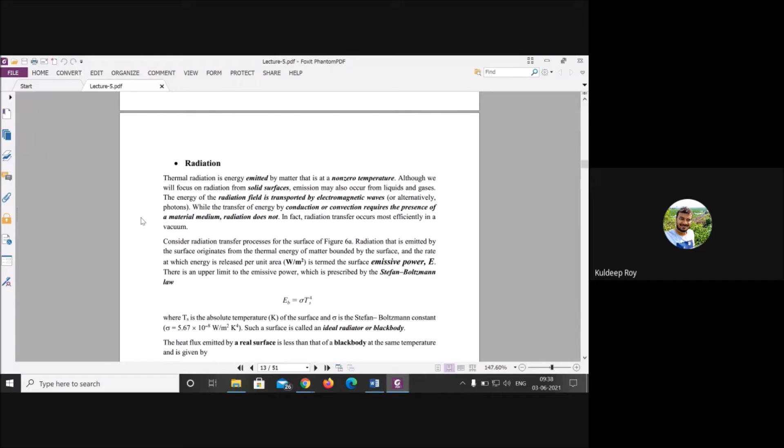Before going into radiation, we will see the fundamental thing. We have seen that due to the electromagnetic wave there is some kind of transfer of energy, but how is it happening, what is the basic reason behind that?

First we will see the very basic theory, called the Prevost theory, which tells us how energy is transferring from one substance to another. The statement is: every material body at any temperature above absolute zero radiates heat to the surrounding and at the same time absorbs heat from the surrounding.

What does that mean? It means if you have any kind of body, it has tendency to absorb heat and it has tendency to emit heat. It will emit heat from the surface, I'm talking about from the surface.

If you wear any kind of cloth, or have any tube bulb or fan, each and every time if it is in equilibrium position, then it will absorb some kind of radiation, and at the same time it will emit and radiate some kind of energy in the form of electromagnetic wave. This is the basic thing discussed by Prevost theory.

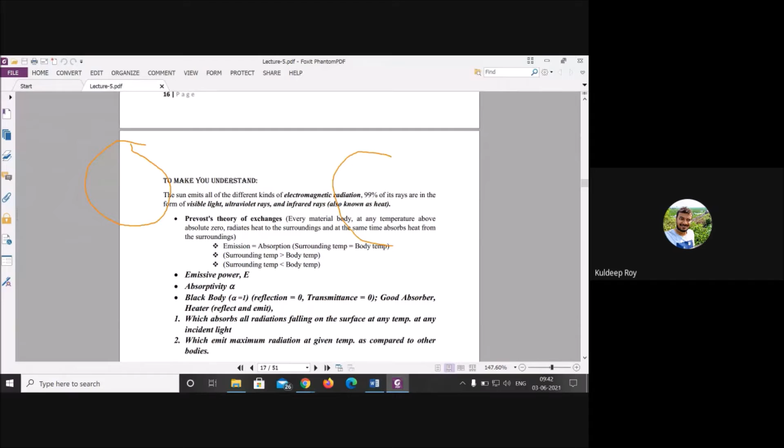This is your any random body, and this is your black body - see the concept of black body. This is any kind of body, I'm writing here B, and this is the black body.

Now, we know from the theory, for the ideal condition - this only exists in ideal condition - this black body will absorb all amount of energy, all amount of energy. Means it will completely absorb all heat. If I'm assuming that you are giving 100...

incident light - I'm just giving an example, just taking 100. If all the 100 rays come around the surface, it will absorb all that incident light. But the normal body will absorb only, if I'm assuming, near about 60, 40 or 50 - I'm taking 60. Now you can see it is absorbing 100 completely because this is black body, and the normal body absorbing...

absorption will be lower as compared to black body. So I am assuming here it is absorbing only 60. Now, if you talk about absorptivity, you have already seen that black body completely absorbs all the radiation, so absorptivity for black body will be 1.

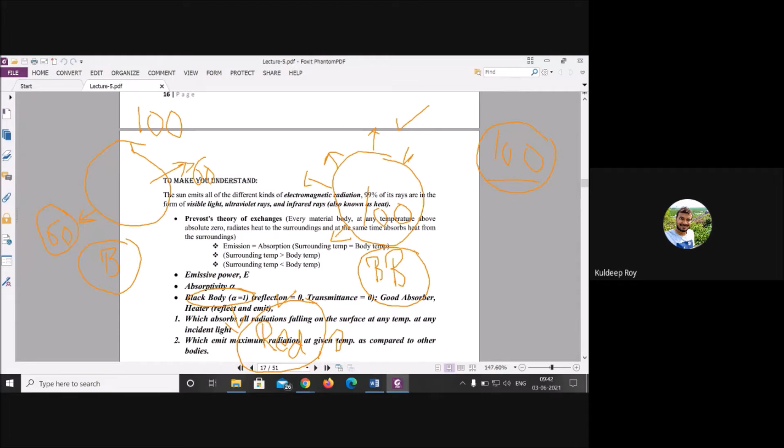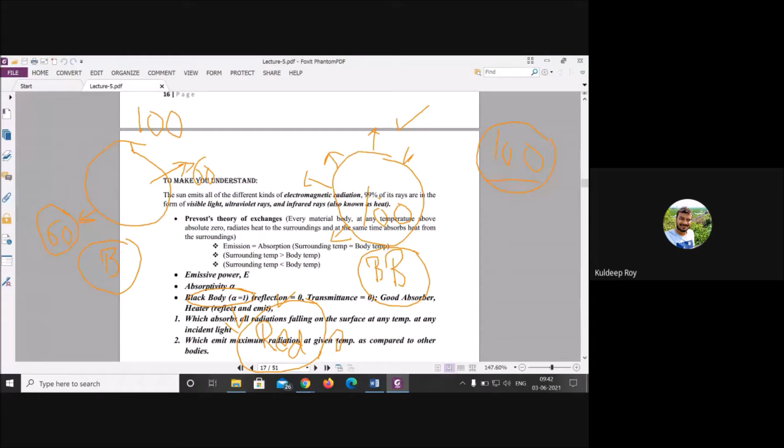So you have got a little bit of idea about how the black body works and how it is different from a normal body - absorption will be very high, then emission will be very high for the black body. So here is one formula, alpha - there is one formula, let me show it, I have already written it here.

Alpha is equal to heat absorbed by the body, how much heat gets absorbed, divided by how much light is incident on the body. Let's compare this theoretically.

Consider two bodies: this is your black body, and this is your polished body, where you have polished the surface with paint or any kind of glossy coating.

Now, as I told you, suppose you have given 100 light. This is just an assumption, I'm giving it in digits, and you have given 100 here also.

Heat absorbed by the body: if you're talking about a black body, it will absorb completely, so 100 out of 100 will be absorbed. If you determine the ratio, alpha is equal to 100 rays incident and 100 absorbed, so alpha will be 1 for a black body.

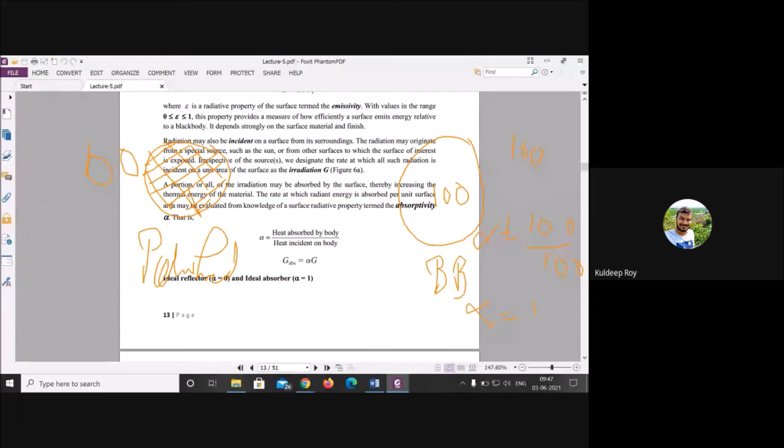You have proved that thing. But this is your polished body. What is the function of a polished body? It will reflect all the heat.

Generally, what people do in summer is wear white cloth. Why white cloth? Because its reflection is very high, it will reflect all kinds of rays and will not allow heat to go inside your body.

So this is the work of white color. Similarly, if you polish this surface, it will reflect all the heat. If you send 100 incident rays, it reflects all of it. If this body is an ideal reflector, absorption will be 0, so alpha will be 0.

So ideal reflector has alpha equal to 0, and ideal absorber has alpha equal to 1. These are hypothetical bodies, but generally used in industry. If you want to derive any kind of radiation-based derivation, you assume a body is a good absorber, in the category of black body, then alpha will be 1.

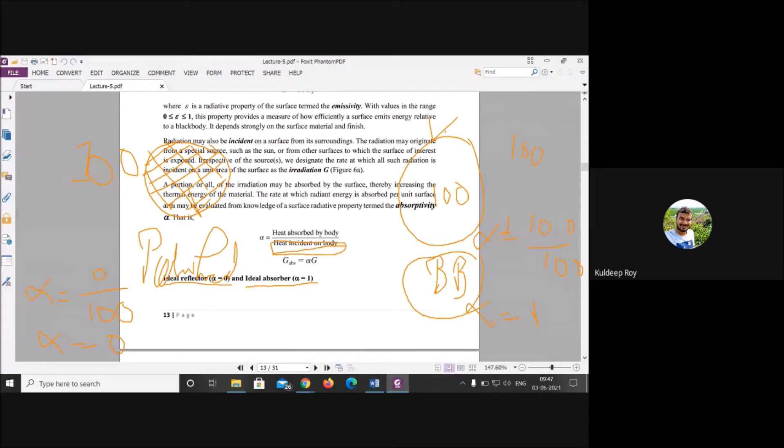So alpha is the ratio of heat absorbed by the body, divided by heat incident on the body, meaning how much light is incident on the surface of the body. I think you have got the point.

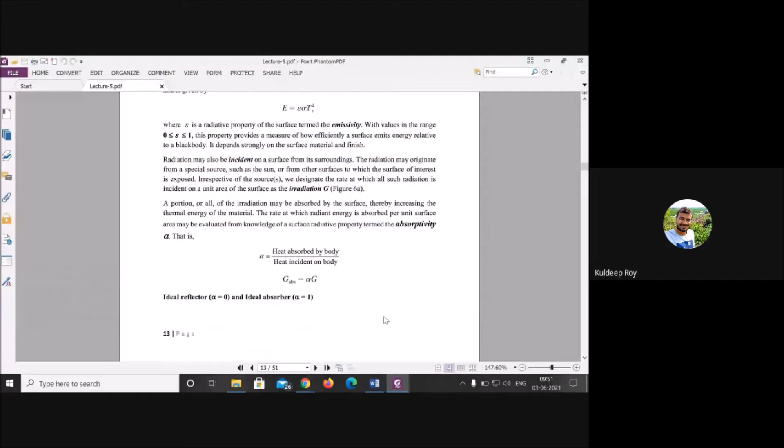So we have seen a little bit about emissivity, which depends on temperature, area, and other properties. Moving ahead, we have discussed black body as well, and now we will talk about some fundamental theories, like Kirchhoff's law.

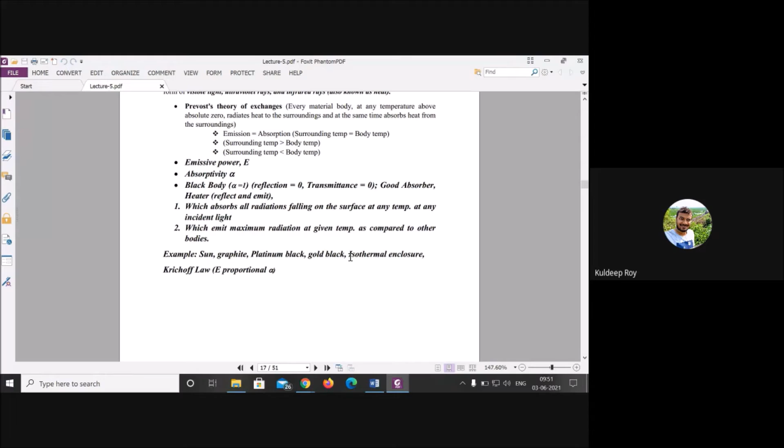There are a few examples of black bodies, like the sun, graphite, which is a black kind of carbon material, platinum black, gold black, and isothermal enclosure. These are examples of black bodies.

Now we will see what Kirchhoff's law is. It states that the emissivity of the body at a particular temperature is numerically equal to its absorptivity for radiant energy from the body at the same temperature. So emissivity is proportional to absorptivity. This is explained by Kirchhoff's law.

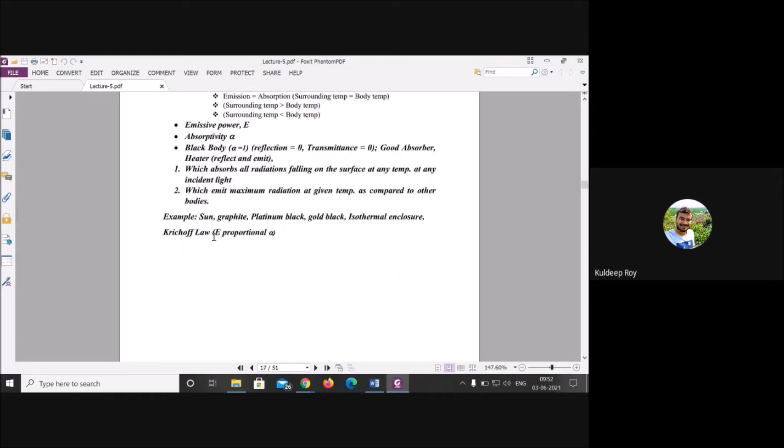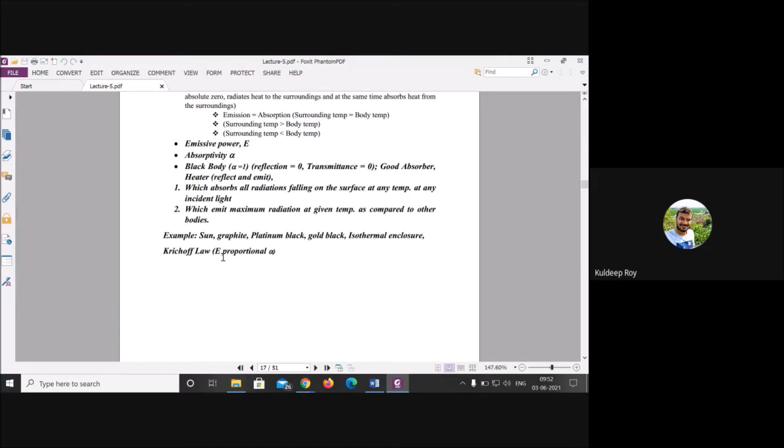We have written the same thing here, that it is proportional. If you are talking about a black body, then only this kind of condition exists, meaning it will follow Kirchhoff's law: complete absorption and complete emission are proportional, meaning both are equal. If there is any discrepancy, you have to add other factors to explain this phenomenon.

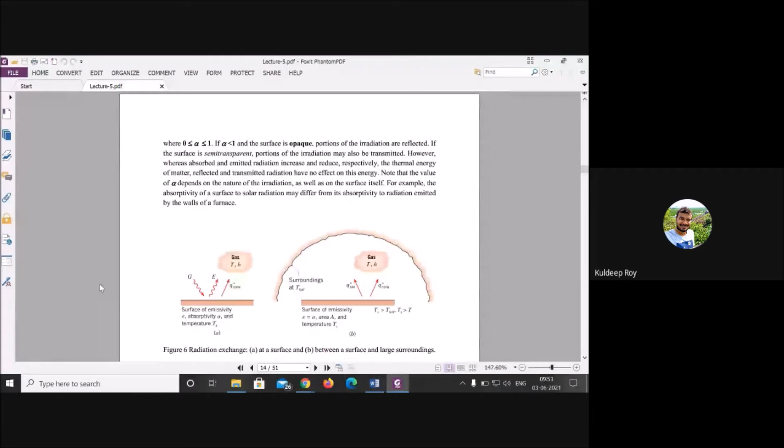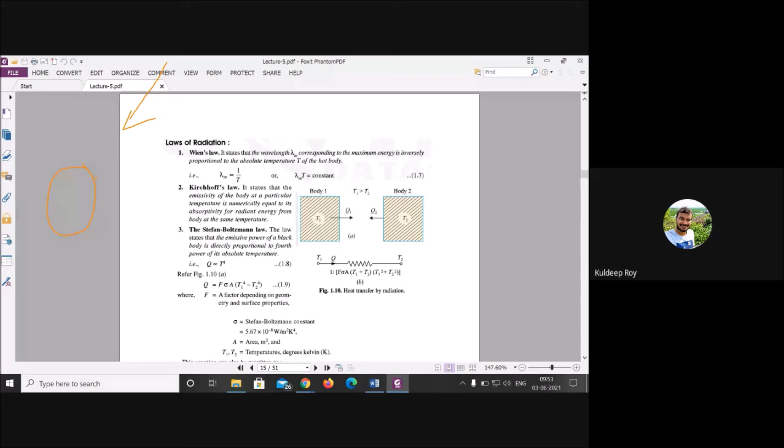Now the second thing is Wien's displacement law. It states that the wavelength corresponding to maximum energy is inversely proportional to the temperature of the hot body. It's saying that if you have rays coming from the sun, a body can absorb a particular maximum wavelength, lambda.

For example, 250 nanometer. If a body absorbs only 250 nanometers as its maximum wavelength, when you multiply this lambda with the temperature, how much heat it is absorbing on the surface will be constant. This is the formula of Wien's displacement law, and the same approach can be applied to determine distance as well.

If you have any kind of body, this is constant, it is a fixed value. By knowing the temperature, you can easily determine the maximum wavelength, and by knowing the value of lambda, you can easily determine the temperature of a particular body.

It can be very far from your position as well. If you have one body here and another body here, and the distance is 1000 kilometers or 500 kilometers, then how will you determine the temperature or lambda?

One body has some maximum wavelength with respect to temperature, you have to multiply, and this is also a constant value B. If you want to compare one body to another, just multiply, and you can easily determine how much the value will be.

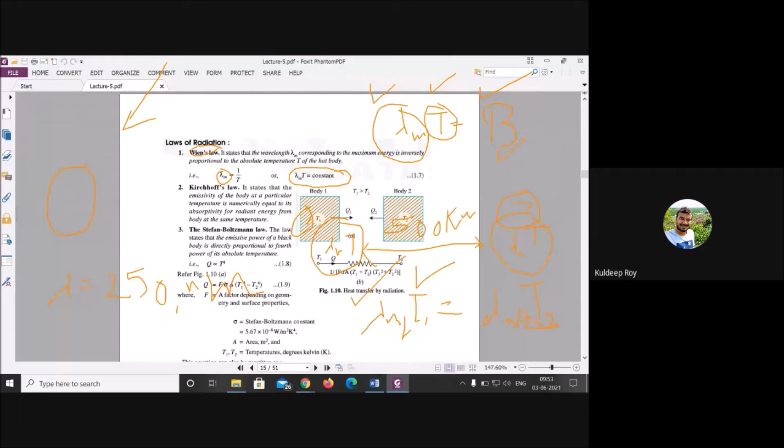Or if you want to determine the distance, since this is a constant value, you can easily determine lambda m. Lambda m is equal to beta, B meaning the constant value, divided by your temperature. You can easily get it.

Now the second formula, this is called the Stefan-Boltzmann law. It states that the emissive power of a black body is directly proportional to the fourth power of its absolute temperature. This means Q, the heat absorbed by the body, is proportional to T to the power 4.

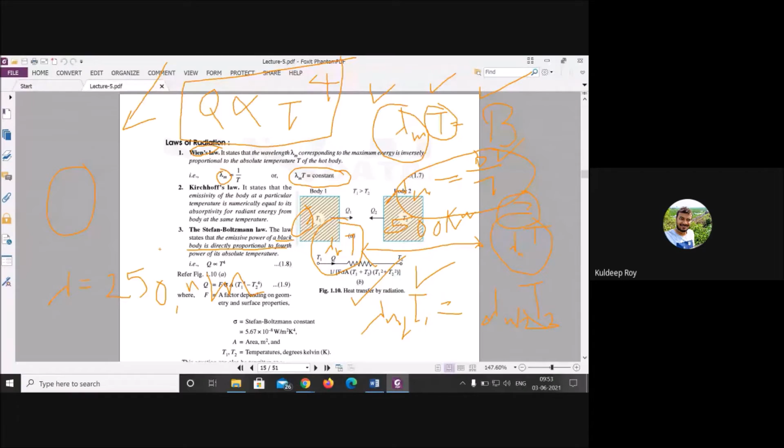This is the formula of the Stefan-Boltzmann law. These are the three very fundamental theories that explain the mechanism of radiation. So we will move ahead and discuss further.

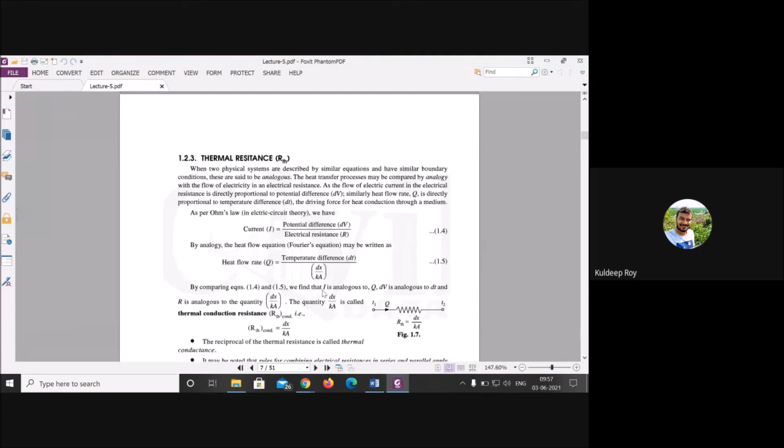Now we have also determined how much the internal thermal resistance will be. How much will be the resistance? The same thing we saw earlier, delta V by R, like in electricity: temperature difference divided by the resistance. This will be your resistance. The same thing you can easily determine here also.

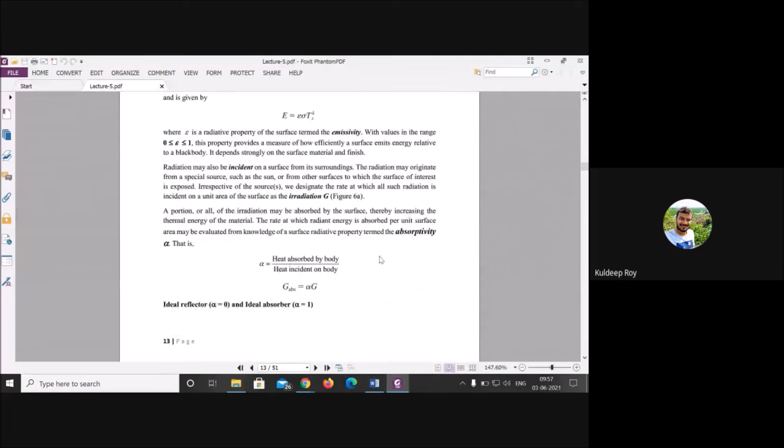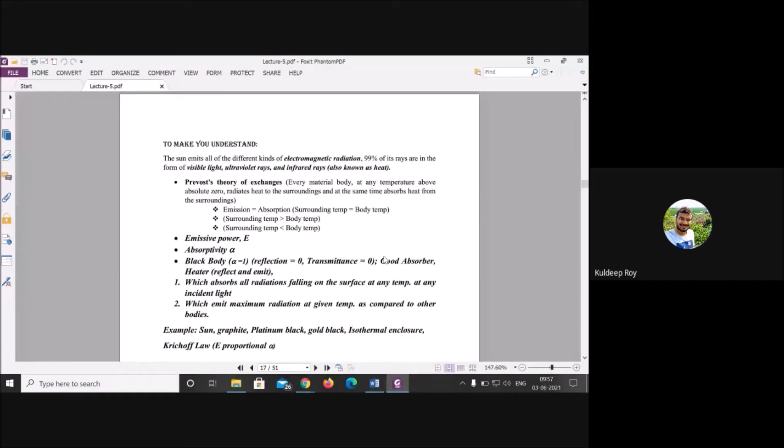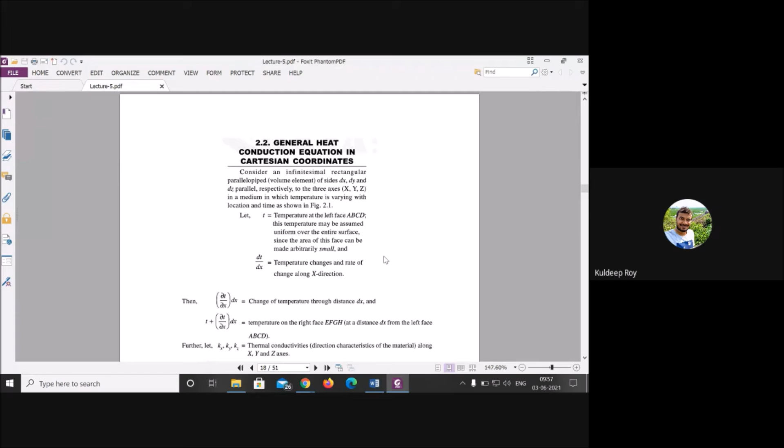Now you can see here we have determined this: the temperature difference, and this whole term will be your resistance term. Okay, I think this is finished. We will now see heat transfer by conduction, and how we can derive the fundamental theory, Poisson's theory—all these theories we will see.

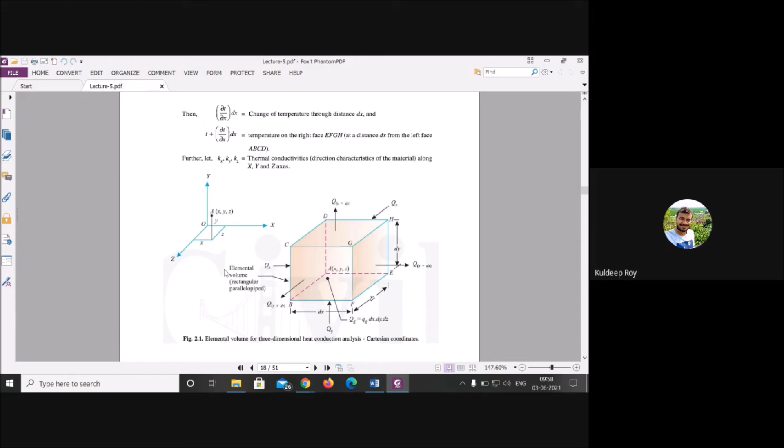So this is your body, any kind of three-dimensional body. What you have to do is determine how much heat will propagate from this position to this position, or in this direction, or upward. We have to determine in Cartesian coordinates how it is changing. So we have to write the material balance or energy balance at each and every point.

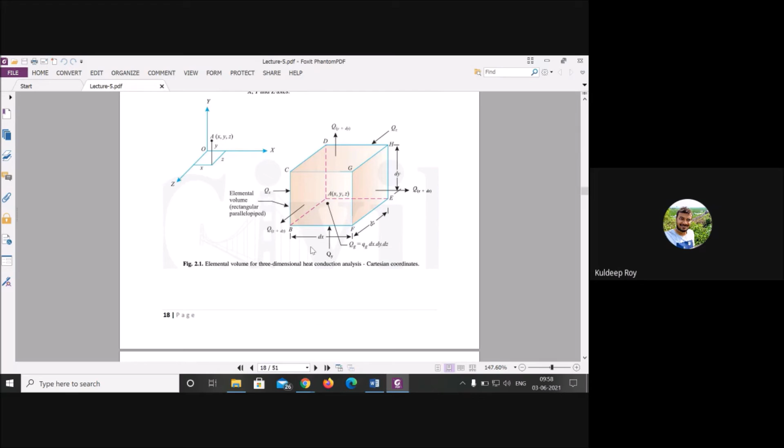Now start with the material balance. We will directly go to the final expression—not final, let me explain one by one. First, if you provide some heat, then at a distance delta x there will be a change in heat, qx plus delta x. As I already told you, whenever you write any material balance, you have to keep in mind that your dimensions should be balanced.

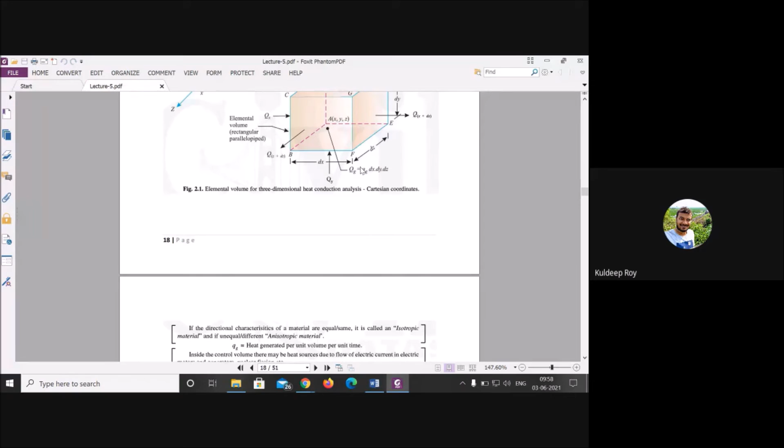Now you can see first heat generation, qg: the formula is qg equal to small q, the heat generation, multiplied by the volume of the whole cube, and you have multiplied.

After that, how will you write this thing? If the heat is flowing in one direction, let's say x direction, assuming x to x, you have qx here, and here you have qx plus delta x.

How will you write qx plus delta x? First you write this amount of energy, qx plus dou by dou x, qx multiplied by delta x. If you do the material balance or unit balance, if you cut this value, you will get the same q energy.

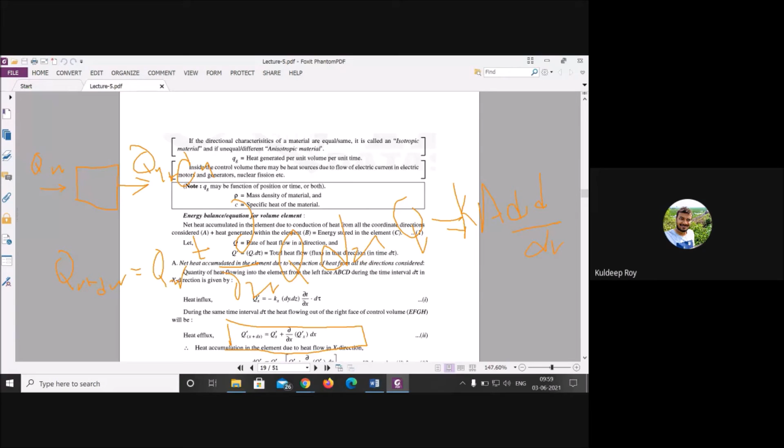Same thing is written here, qx plus delta x will follow this formula. Q will be ka, delta t by delta x, this is ka. This is Fourier's law of heat conduction. Just write all these values.

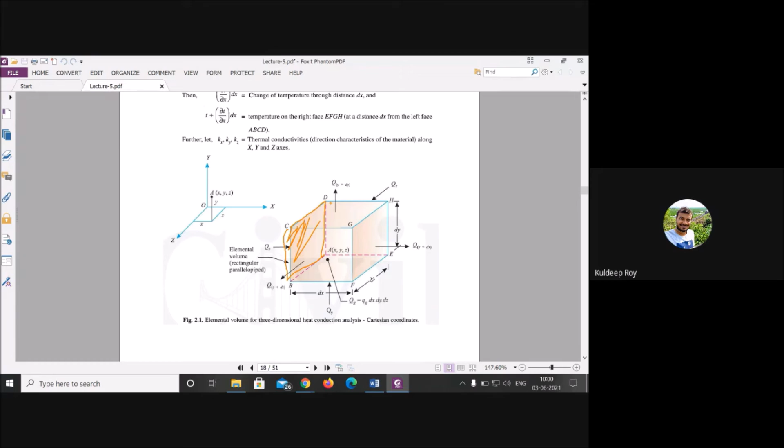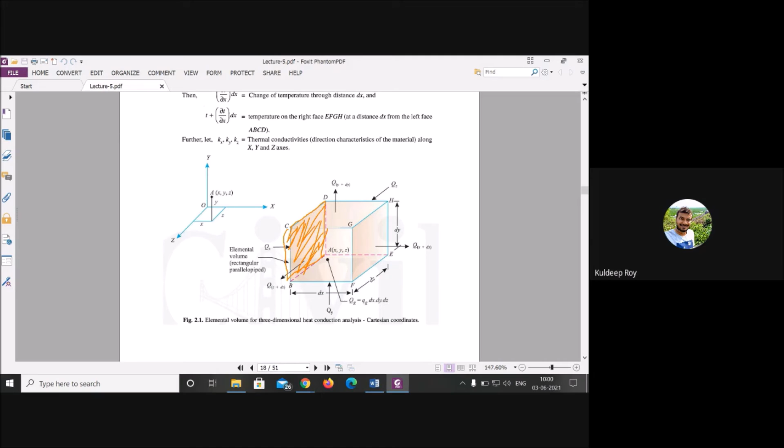Now you can see ka delta a will be your perpendicular area, as he has taken it. Perpendicular area means if the heat flows from this position, then the area will be this segment, this is y, this particular perpendicular area in the cube, that section, q multiplied by perpendicular area. It will be y here, and z here. That's why he has written delta y and delta z multiplied by dou t by dou x, multiplied by, this is for a small time segment.

After putting all the values, q will be cancelled out, because q you are entering will cancel out, and this whole term will remain. Q, you already know the formula, Ka del T by del X for a small segment, for a small time interval. When you multiply, you will get this value.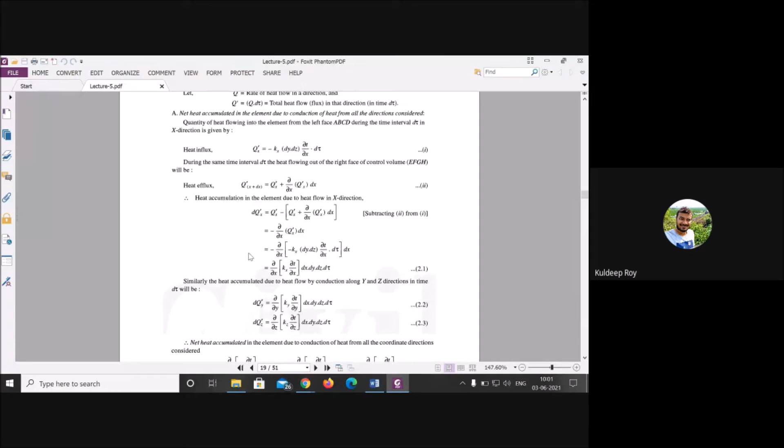Same thing you have to write for X, Y, Z. It will be the same, because if you write for one Cartesian coordinate, the others will be same for Y and Z, both positions will be same. Then you have to add all these things, and after adding, you get the final expression. Now you have got one term.

Then the second term will be your heat generation term, Qg. We have already seen that Qg multiplied by the volume for the small time interval, and this is the energy stored by the element. How much will it store? Now you can see rho is the density of the material, and volume, how much is the volume?

This is nothing but the mass, mcp dt, mcp delta T is equal to this, the formula using specific heat capacity of any material, this is the temperature difference and this is the mass, and rho is equal to m by v.

M will be rho v, and the same thing is written here, density multiplied by volume. If you put C as your specific heat capacity, C delta T by delta tau with respect to time, mcp del T. But if you do the unit balance, delta T will be cancelled out. We are talking about a small time interval, so we take delta tau and delta tau. I think you have got it.

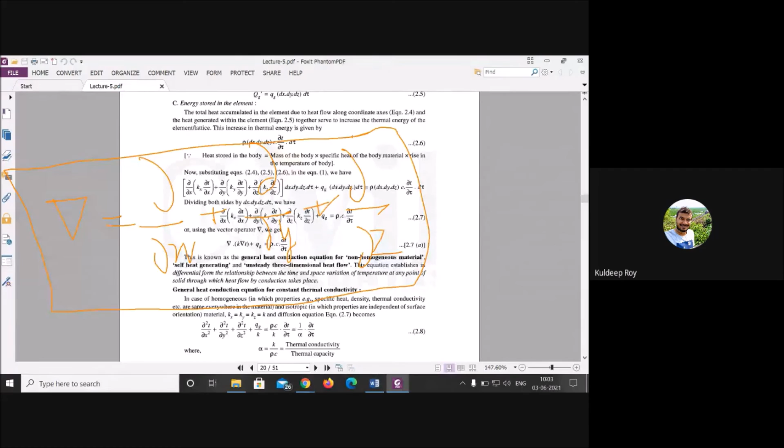K will be inside, and there is one operator as well. Now you can see, if you assume that thermal conductivity is constant throughout the material, then it will multiply. It is written here that if thermal conductivity is not changing with respect to direction, meaning it is constant, then it will come out. Now you can see kx, ky, kz, then it will come out and multiply.

It will become the square term. This is the square term. And this will be the whole formula.

After that, one more term comes into the picture: thermal diffusivity. I will discuss this in mass transfer as well. The formula is alpha is equal to thermal conductivity divided by thermal capacity. Conductivity is K, capacity is C multiplied by rho. This is your thermal capacity.

This final expression, when you rearrange, you get this final expression, which is called the Fourier's equation. When you assume that no internal source of heat generation is present, then this formula gets converted into this, and it becomes Fourier's equation.

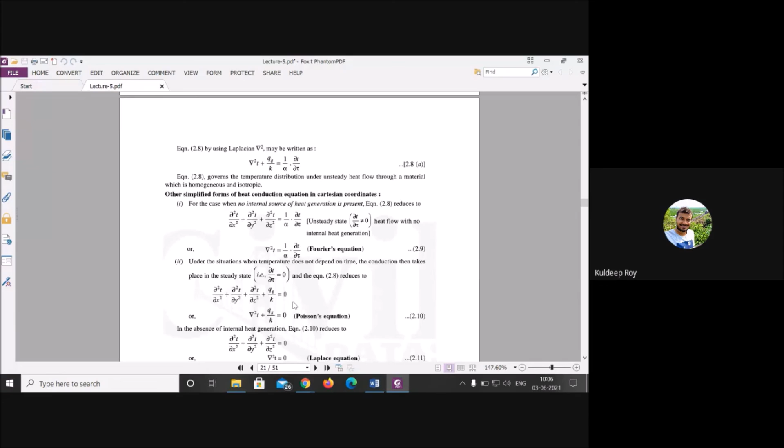Now this is the second term. When you apply, say, a steady state condition, this particular term will be 0. Then what will happen? This will be the formula. This is called the Poisson equation.

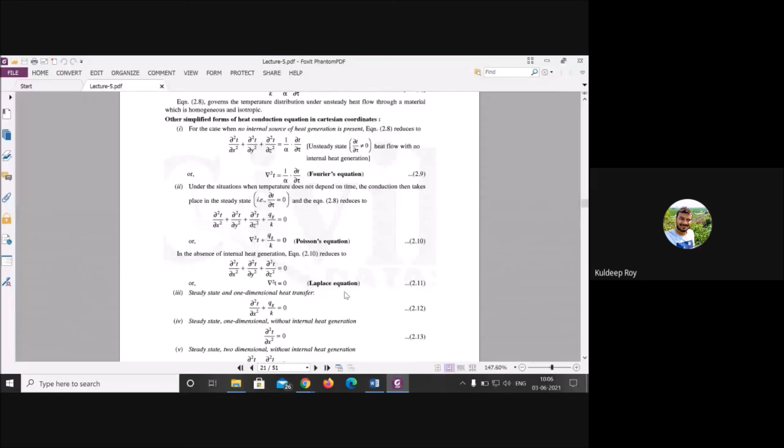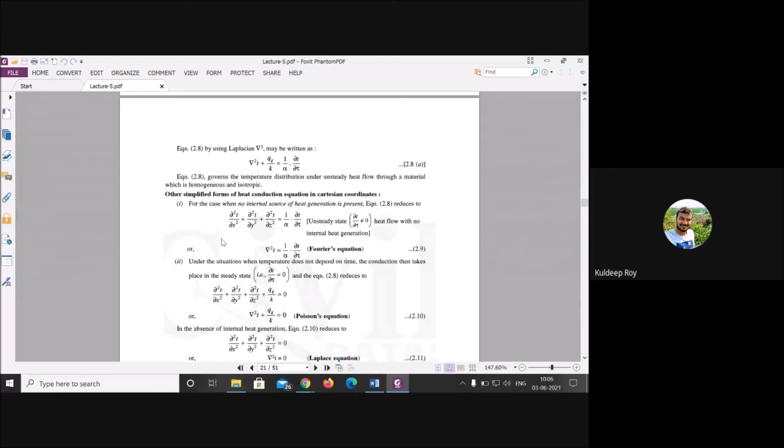And when you assume there is no internal heat generation and a steady state condition, then this is called the Laplace equation. These are further modifications based on your application. This is the fundamental expression for your Cartesian coordinate for any kind of body for heat conduction. For Cartesian coordinates, meaning x, y, z condition, only then this kind of theory is applicable. Here you have seen three kinds of formula: one is the Fourier equation, another is the Poisson equation, and the Laplace equation.

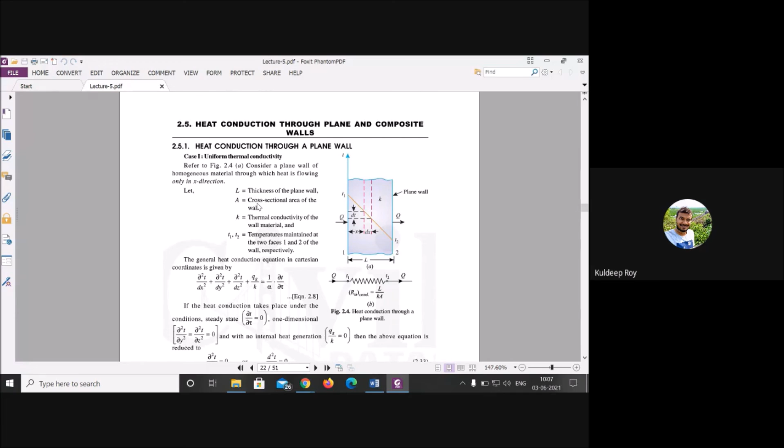This is for a composite body, and we have solved a lot of problems based on that. Here we have seen how the body acts as a resistance, and how we will solve it like these circuits.

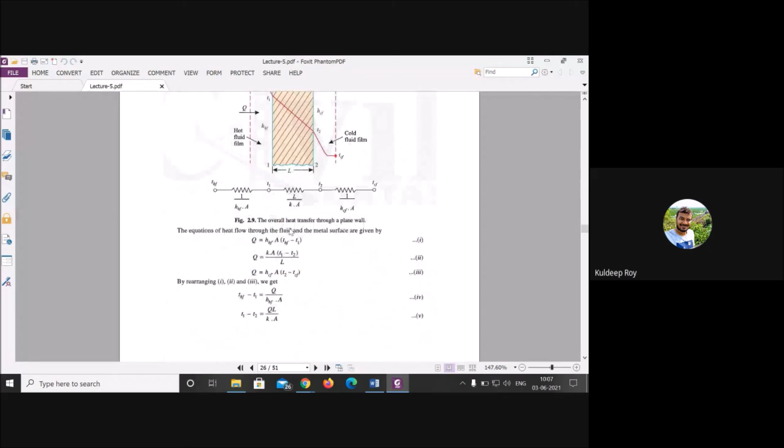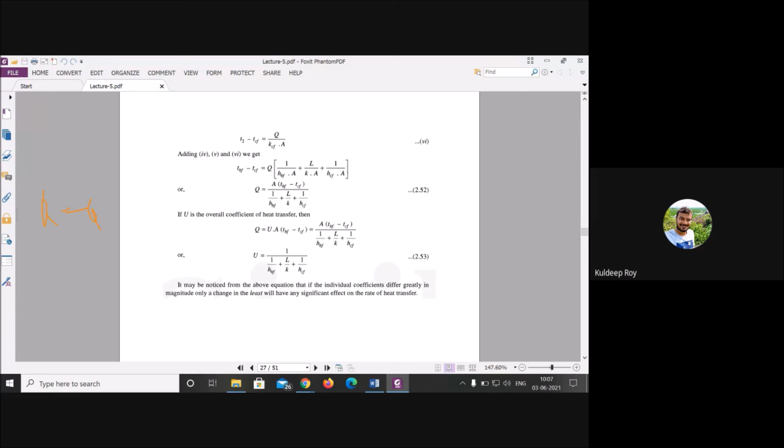Just add all the values, and by doing some rearrangement, you will get the final expression. This is UA delta T. You generally apply Q is equal to A delta T. Q is equal to KA delta T. And Q is equal to, for convection, HA delta T.

If you want to add both terms, then there is one formula: Q is equal to UA delta T. U will be your overall heat transfer coefficient. This is conduction heat transfer coefficient, this is the convective heat transfer coefficient, area, and this is delta T by delta X, which is your change in temperature.

And here it will be UA delta T. Delta T means the whole body. If you are talking about composite, there are three kinds of material, 1, 2, 3, and here will be some hot material, and here will be the cold material.

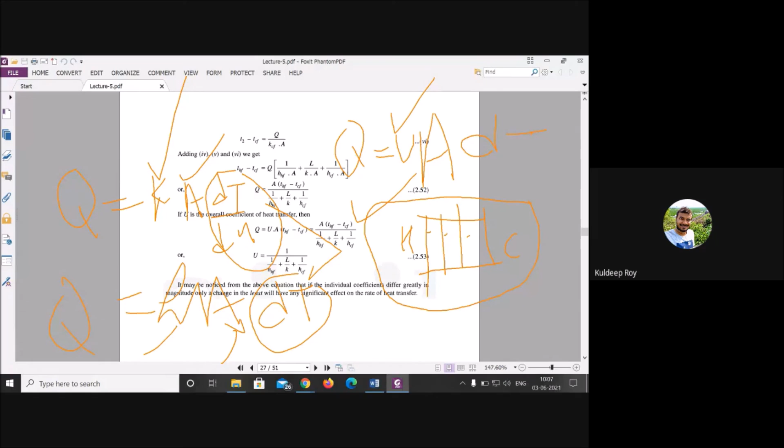If you want to determine the whole heat transfer for the whole body, then you have to apply Q is equal to UA delta T. This is the formula for overall heat transfer coefficient, and if you see, it incorporates both convective heat transfer and conduction heat transfer.

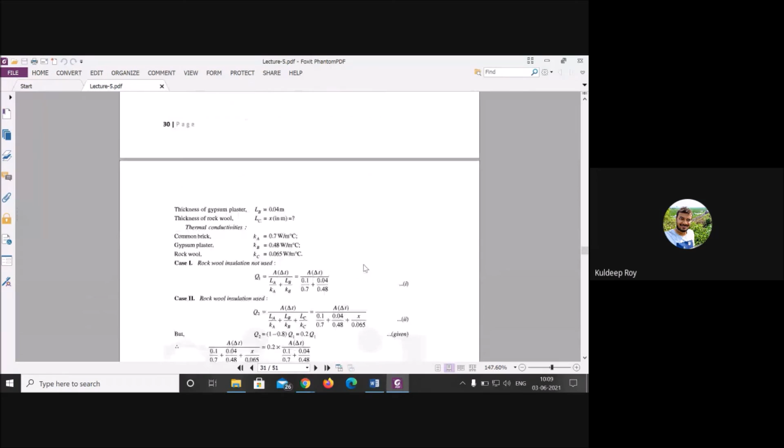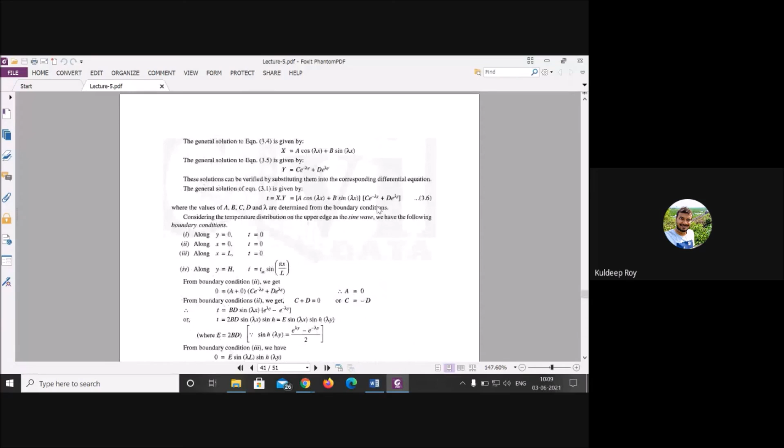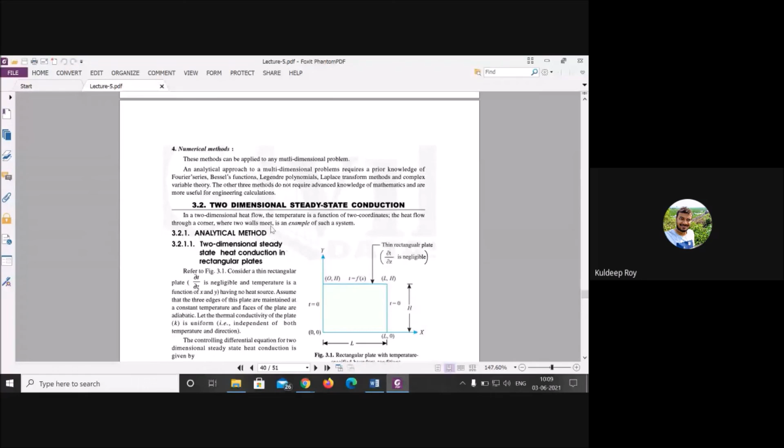And these were the numericals, and we have solved 5 to 6 numericals as well. We also did this simulation as well, and here we also discussed that there are three kinds of approaches: analytical method, graphical method or analogical method, and the non-dimensional, or you can say the numerical method. These are the three approaches we generally apply to determine how much is the heat transfer.

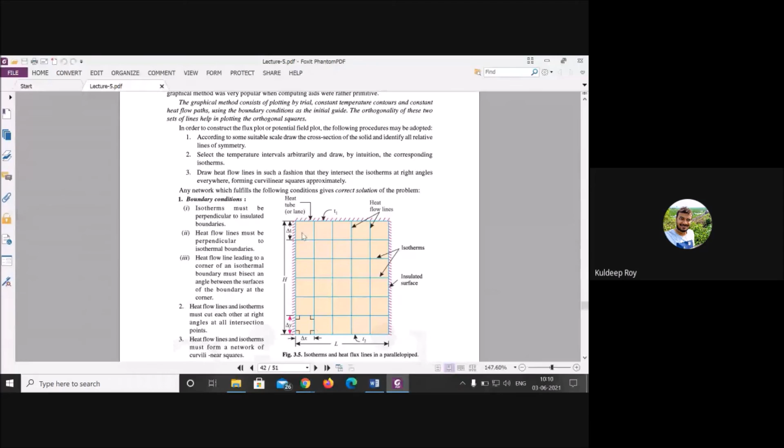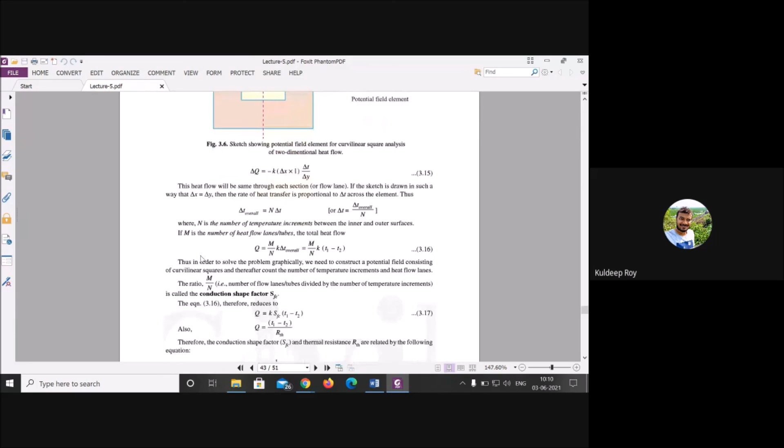Now you can see the graphical representation. You have to convert it into small pieces, or cut it into very small segments, and assume that these are equivalent to a rectangular kind of thing.

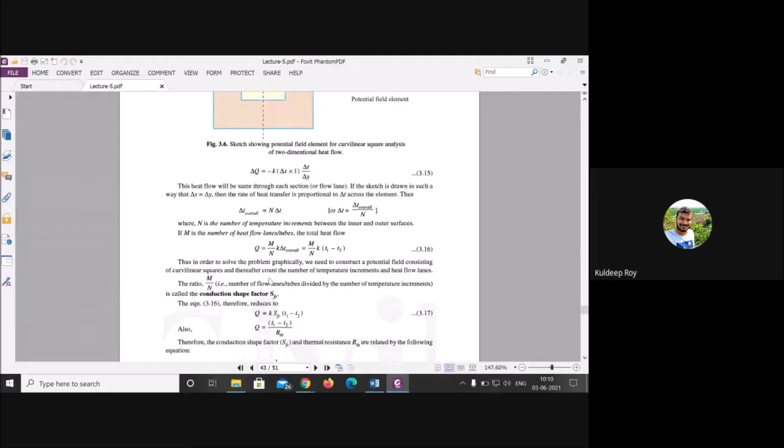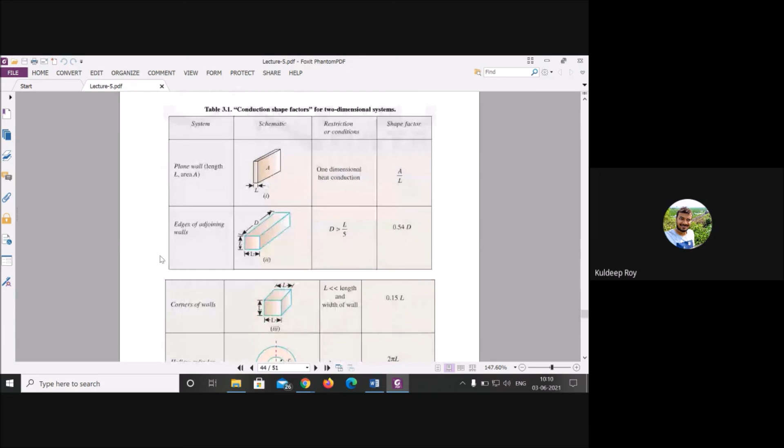This kind of factor is generally applied for determining or calculating the numericals, only numericals, there is no theory as well. If you have any kind of shaped body, not rectangular, any kind of circular or cylindrical body, if you want to determine it, you have to cut it into small pieces and apply the graphical representation. These are the formulas for shape factors, because there is one term called the shape factor. If you get this kind of problem, you have to apply this formula.